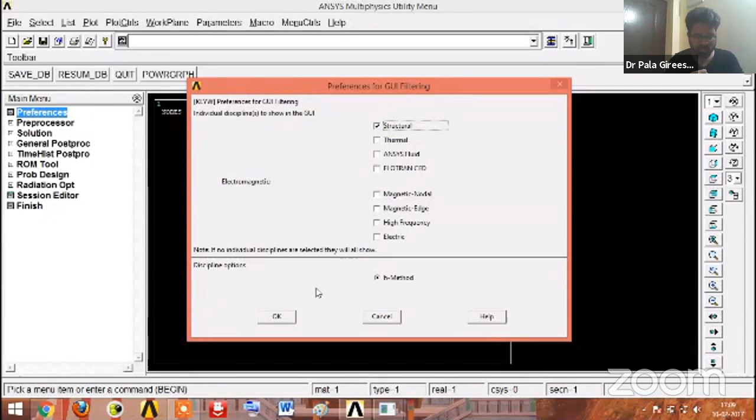Is it visible now? Yes, your screen is visible, sir, your desktop screen is visible. Is it running? No, we are still able to see only the desktop screen. Now something is coming, click play, sir. Is it working? The answers are visible, sir. Okay, now it's running, the answers are showing properly, sir. This is okay.

At the end I'll show this. Please help me out at the end, maybe after 1 hour. Sure, sir. After 1 hour I have my presentation, after that I'll show this. Okay sir.

So shall we start now? Just we will have some introduction first, then we'll begin.

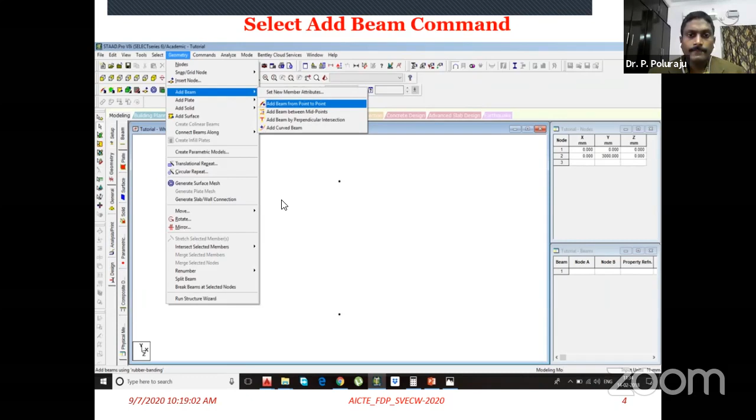So after that, you can draw one point to point, whatever nodal points we have created. Then after creating the nodal point, by using the geometry option again, after selecting the created add beam between two nodal points, you have to select that and go to geometry again and take the translation repeat option. Translation repeat basically happens like this.

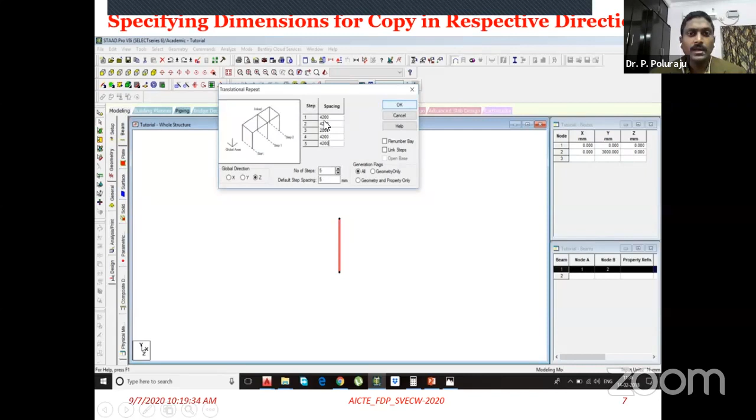When you open this, it will give the global directions like X, Y, Z. So I wanted to copy along the Z direction, and set how many steps or bays I want. That is a 4.2 meter bay width, and I wanted to make around 5 bays. So that's how I have created it, you can see here.

This is created. Then again select, and wherever I want, like now in the X direction, how many bays - it depends on your building plan. After creating like this, you can create all connected beams on the top floor, because at the bottom that is nothing but foundations. Foundations generally get a fixed support given, and in the software also we give the same scenario.

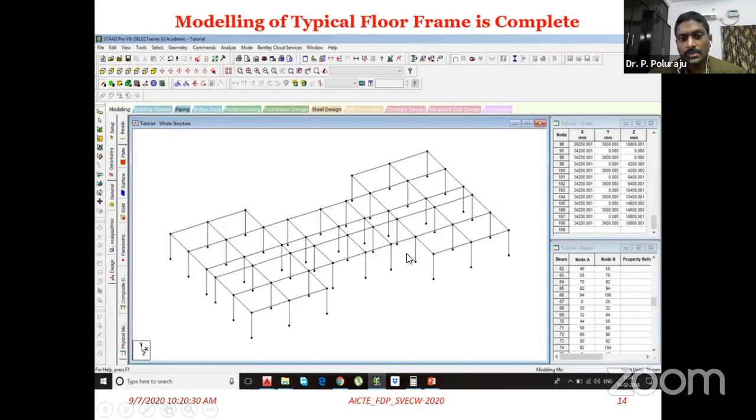After creating that, it's like a typical customized plan. One side has a number of spans, whereas in between it is reduced, because it is maybe a lift area or lift portion. There is also an open to sky area. These are all there, so it's a typical plan, and of course when it comes to the model, you can understand that.

Then using the translation command, we replicate frames for higher stories. Again using translation repeat from the geometry, it can be replicated from whatever we want in the vertical direction. So this is ready now, you can see the vertical direction. Likewise, the modeling of the frames of the building is complete.

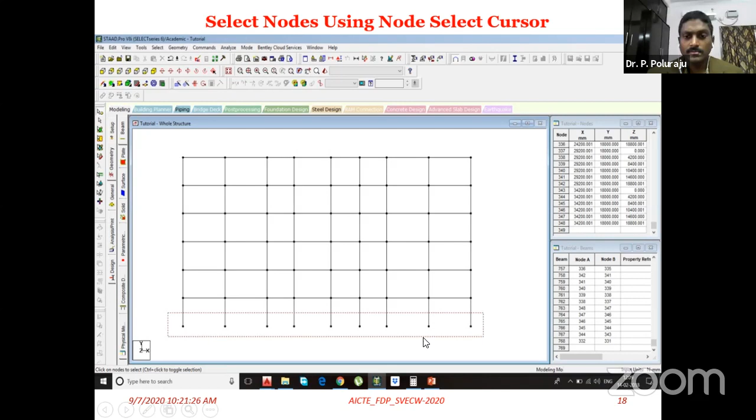You can select the front view of your total model. Then go to the select option. In the node cursor, you can select all the bottom nodal points at the bottommost level. At a time, it will be selected. It looks like only one side is selected, but it will be selected overall in our building, under all the nodal points.

Then select the support sections, the support option, create new support condition from the menu bar. You can see the support conditions here. From the support condition, you can create the fixed support. After giving fixed support, you can apply it.

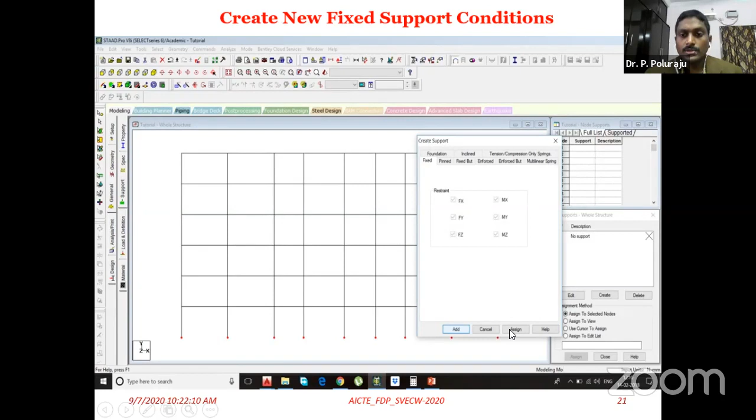For fixed support, generally three translations and three rotations would be there. All of them you have to restrict, meaning you have to hold them. So FX, FY, FZ, MX, MY, and MZ, you have to hold. Then you have to click on that, actually check that. Once you check and add that option, it will be assigned to the selected nodal points at the bottom.

Now your total building is fixed at the bottom, because it indicates the simulation of the fixed support of your building, like foundations, since all buildings are nothing but cantilever problems. Is it correct? Cantilever problem means one side is fixed and the other side is free. So if you talk about the topmost portion of your building, the terrace portion, that's free.

So your building is typically nothing but a cantilever problem. So fixity is assigned. Now the 3D view after support assignment, you can see it has been assigned everywhere.

Then after that, you can add the plate command to create walls. That can be done from geometry, from add plates. You can use the quadrat, because quadrat means you get 4 points. So wherever you want, you can select those 4 points, depending on your nodal points, wherever you want the wall or slab. Slab is nothing but a diaphragm.

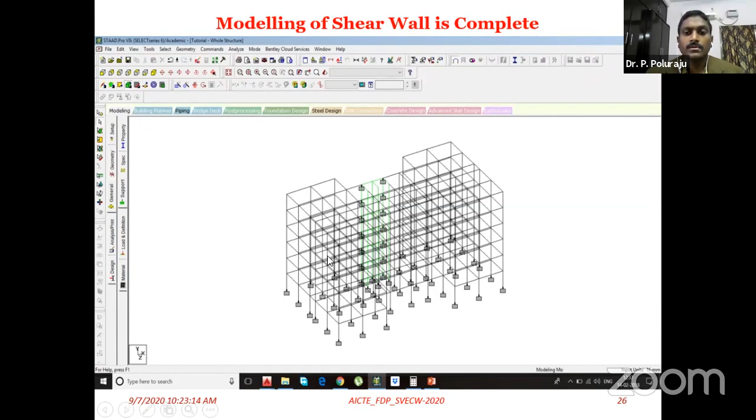So modeling of the shear wall is complete now, because by using this option, the shear wall has been created here. What is a shear wall? Shear wall is nothing but like a lift wall. In majority of cases, lift walls are generally solid concrete walls, so it will act as a shear wall as well as serve for lift purposes. After creating that, you can see the top view of your shear wall portion.

Now, after the shear wall is complete, the next point is you can create the slabs at different floors. I am creating this according to my own understanding. I will not say it is a cellar or ground floor. It is basically a stilt floor, wherever you park in any apartment. Just above the stilt floor is the ground floor. Above the ground floor is G+1, G+2, G+3, and so on.

This is very important, especially regarding the jurisdictions of Vijayawada building bylaws, Guntur building bylaws, Hyderabad building bylaws. Based on that only, they give approvals for the number of heights of multi-story buildings, depending on the road width in front of your site. For example, you may have a large site, but if your road width is only 12 feet, they will not allow that much height for the building. And it will vary again from Gram Panchayat to corporation.

If you talk about Vijayawada Corporation, the rules and regulations, all setbacks will be totally different compared to Gram Panchayat. In Gram Panchayat, there are no much critical permissions required, you can go with some flexibility. Even from a setbacks point of view, there are some guidelines they provide, like the VMC, Vijayawada Municipal Corporation, now converted into CRDA, Capital Region Development Authority, similar to Visakhapatnam Municipal Corporation.

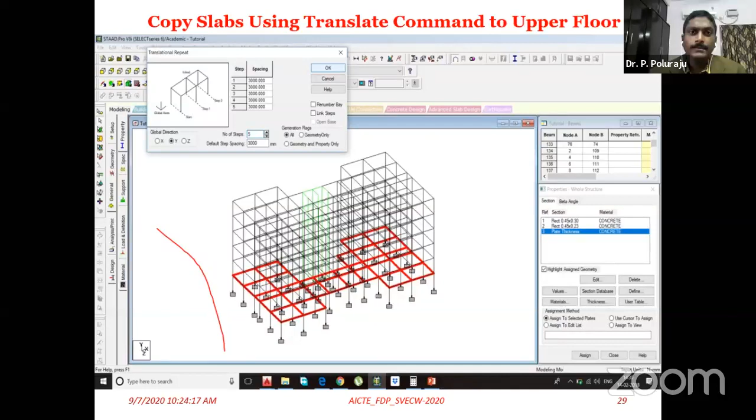And check geometry for multiple structures, whatever the model, everything is created. We have to check for multiple structures, like any duplicate nodal points, or any duplicate members we have created, because it can get very clumsy.

Even simply, I can say this is a little bit of work only. But when you talk about G+100, that time heavy work will come, with a heavy number of nodal points and number of beams. There may be a chance of overwriting of the nodal points as well as members.

So you have to check by going to the menu bar, tools, check multiple structures. Then after that, it will check again - check duplicate nodal points also can be checked like this. The enter tolerance means you are not allowing any tolerance, because if any nodal point is created closely without your notice, that tolerance you have to give so everything will be adjusted.

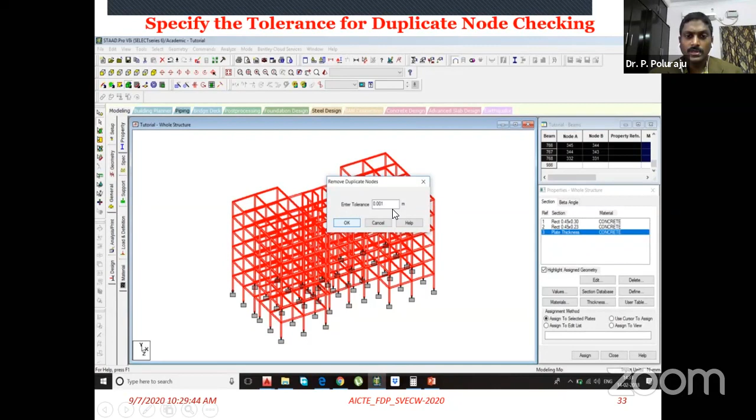Once that is over, the next portion is entering the geometrical properties, because if you want to do the analysis for the created model, this is only a skeleton so far. You have to give the beam depth as well as width, and column cross-section too. Even slab thickness you have to give. The height of the column and length of the beam are already given in the skeleton model itself - now you are giving the geometrical properties of both beam and column, and even slab.

Once you have given these, you can see on the right-hand side rectangular 0.45 means 450, and 0.3 means 300. Again 0.23 - why is it 0.23? It is actually for the beam. Why 0.23 means generally all beams should flush with our two-thickness brick wall, that is, two brick wall thickness.

What is two brick wall thickness actually? 230mm, that's a 9-inch wall. So it should flush with your beams. That is why the width of the beam matters for that, but otherwise width of the beam will not influence anything. Depth of the beam only will influence the bending moment, whatever is coming.

Suppose one column to column distance is more than 5 meters. As per my experience, you must introduce another column in between. Otherwise, you must go with the beam depth more than 600 or 750mm. If it goes beyond 750mm thick depth beam, you have to introduce side face reinforcement as per code, and again it may lead to a deep beam.

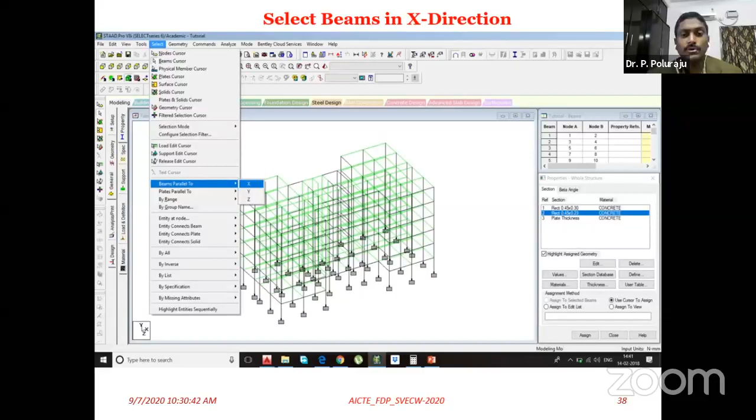Waffle slab means small box kind of things you might have seen. That means a number of beam combinations will be there without intermediate columns. At the end also columns will be there, but it is so costly, because of the number of beams you are introducing, and it looks like one box kind of roof. You can see that is a waffle slab. So that's one idea I'm giving.

Anyhow, beams parallel to X means everything selected along the horizontal direction, and beams parallel to Z also can be selected, another direction. You can see in the coordinate system, X and Z, and Y is always vertical. So after that, once you select it, it has assigned the beam dimensions.

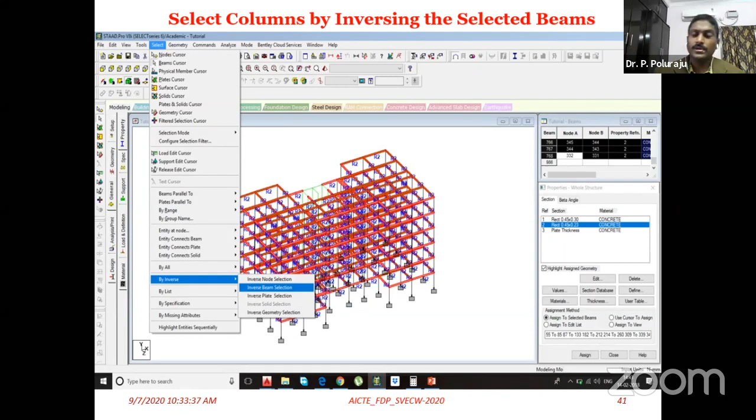Now select the inverse beam selection. Sometimes, if inside a room a beam is coming, you want to shift it into the wall, above the wall. You don't want to keep it in between the center of the room. So that also comes under inverse beam selection, and that can be done too.

Then after that, select all plates and assign the plate property, that is thickness. After that, when it comes to the lift area, there are simply supported beams also.

Sir, for simply supported beams, do we directly keep the roller and the hinges? No, roller and hinges we will not keep. It will look like a rigid beam only, but we will design that beam as a simply supported beam. How do we design a simply supported beam?

Basically for the fixed beam, your bending moment diagram formula with UDL is WL square by 12. For simply supported, it's WL square by 8. So WL square by 8 means denominator is only 8 for simply supported, whereas for fixed support denominator is 12. That means it indicates you are keeping more reinforcement in the simply supported beam.

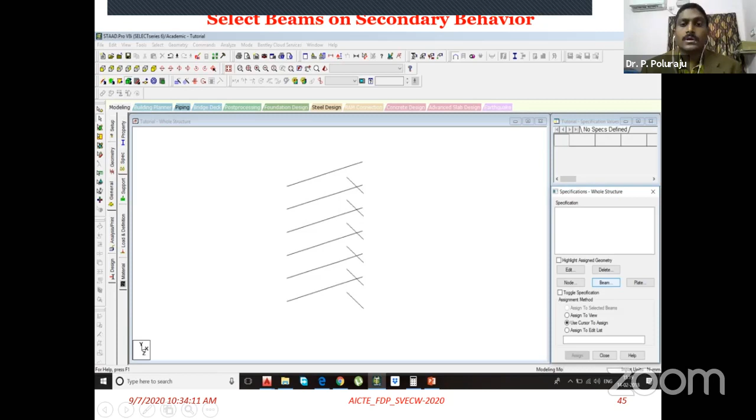So likewise, you have to design the simply supported beam wherever required, especially secondary beams. Secondary beams means beams resting on another beam. The beam resting on two columns, that means supports, is the main beam, which is directly looking like a rigid beam, nothing but a fixed beam. Whereas the secondary beam, which rests on another primary beam, is actually converted into a simply supported beam. In the software, you will release the moment.

You know contra flexure, point of contraflexure.

If you talk about the simply supported bending moment diagram, and the bending moment diagram for the fixed beam, you can observe negative bending moment at the fixed support because of the fixity at both ends. Negative bending moment means you have to provide additional reinforcement at the top, whereas for positive moment, reinforcement is kept at the bottom. That is the reinforcement detailing we practically follow.

And in the software, you have to release the moment there. Then automatically that beam will be designed as a simply supported beam.

This can be done by selecting this option. You can select this and release the moments wherever you want. Once you release the moments, you can see this beam is simply supported, and this beam is one side simply supported, meaning it is not fixed here. Again, this beam is one side fixed and the other side free. But this beam looks like a simply supported beam, and this one too.

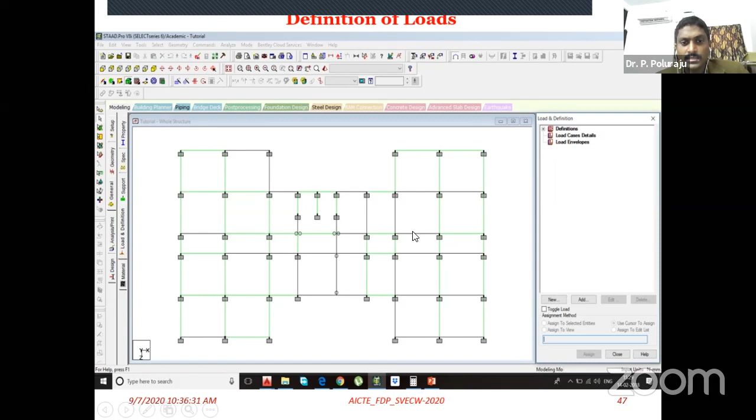Here also this is a simply supported beam, because it depends - see this beam, if it is resting on two supports, two columns, correct? Whereas this beam is not resting on any column, it is resting on a beam. So this is a secondary beam actually.

So this is all about releasing the options and how to convert the beams from fixed support to simply supported. Next, moving on to another thing: load cases, like load assignments.

Dead load and live load are the service loads. Apart from that, wind load and earthquake load are occasional loads, depending on your requirement and the locality of the building construction. You have to adapt both wind loads and earthquake loads.

When you talk about wind loads, up to 10 meters height of the building, you don't need to consider any wind load. Beyond 10 meters - each floor is 3 meters, so after about 3 floors you have to consider the wind load effect. But once your building is more than 10 meters height, you must consider the wind load on the entire height of the building. It's not that up to 10 meters no need to consider.

If you add wind load only above that height, it will give another problem. So the condition as per code IS 875 part 3 is: up to 10 meters height, any structure, you don't need to consider wind load effect. If your building is going beyond 10 meters height, you must consider wind loading on the entire height of the building, using one of two methods.

One is the nodal method, otherwise the diaphragm method. Nodal method means at each and every beam-column connection, which is a nodal point, you convert all the wind pressure acting on the columns into a point load at that nodal point, because pressure is in kilonewton per meter square, UDL is kilonewton per meter, whereas point load is in kilonewtons. So like that you have to do.

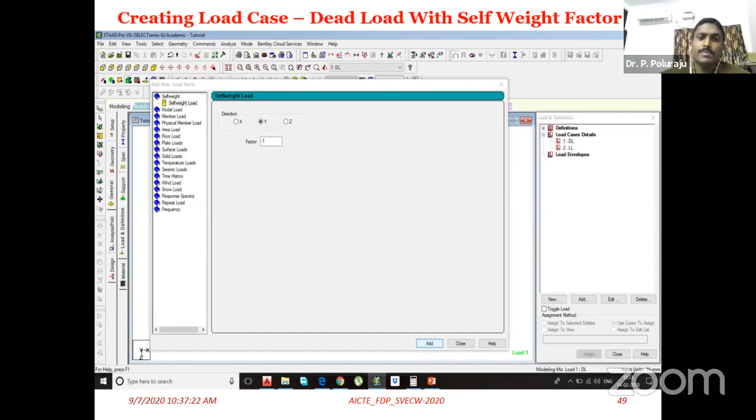Under the dead load, you can first adapt the self weight. Self weight is nothing but 25BD, where 25 is the density of concrete, B is the breadth of the member, and D is the depth of the member. We don't consider length separately, because it's automatically built into the calculations, so this factor is per meter length.

Why minus? Downward, because self weight always acts downward due to gravitational effect, not upward. If you don't add the minus symbol, the load will go up and all your calculations and results will vary and be inaccurate. After that, you can add the self weight and apply further loads on it.

Then you can add the live load. Under live load category, it's nothing but a corridor or lobby load. In the lobby you apply some load, whereas in a pure residential area the live load will be different, because in the lobby you won't keep any cot, furniture, or sofa seat - maximum only human beings will walk there. So lobby load will be different live load.

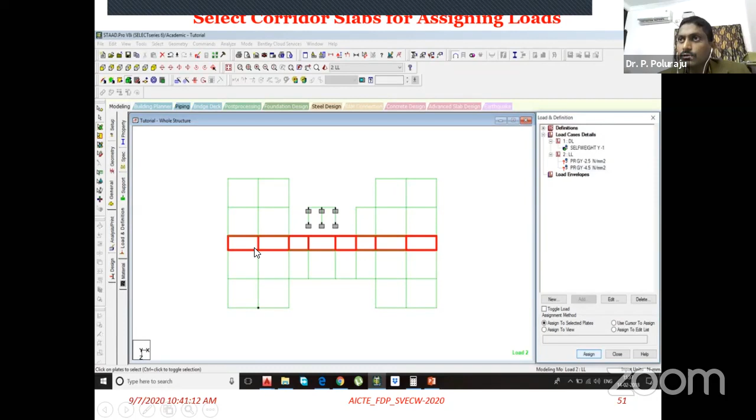Based on that only you have to design the slabs. Why unnecessarily put extra loads on all slabs similarly? That's basically the mass way of doing construction, like a G+5 masonry building - a mason can also construct it, an engineer can also construct it. What is the basic difference between him and us? We have to look after economical construction and give economical design.

Whereas he will do everything like a thumb rule. He won't even check the level of the wall or plastering with a spirit level. He will take a tube filled with water - you hold one side and another person holds the other end. If both levels are same, for him that's leveled. But that is not accurate.

Even what basis will you design the beam? Even if you do typical calculations, whatever he provides practically without any design, the same thing comes out. But from our engineering point of view, we must think about economy - where bending moment is maximum, where it's lesser, and which type of bending moment, negative or positive shear. These factors we consider, whereas he won't see any of that.

What he will do, I'll tell you the thumb rule he follows. For every 1 foot of beam length, he provides 1 inch depth of beam. 1 inch means 2.54 centimeters. 1 foot length means 30 centimeters, 12 inches. So for a 5 feet beam, he provides 5 inches depth - that's 5 into 2.54 centimeters, converted to mm. This is the thumb rule he follows.

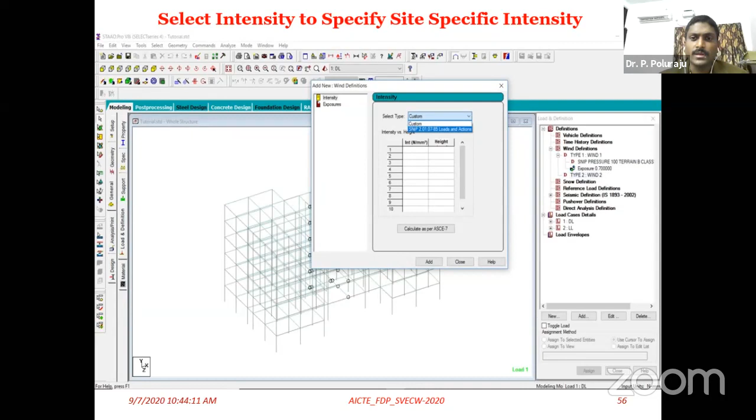So after applying this, the next step is seismic loads, actually earthquake loads. Earthquake loads depend on zone 3 or zone 2, zone 4 or even zone 5, otherwise zone 2. You have to select this depending on your building location, and you have to apply all the factors by calculating.

Now the next important thing is dead load and live load combinations. You must select dead load, live load combinations, that is 1.5. After that, you must move on to the design, actually the concrete design.

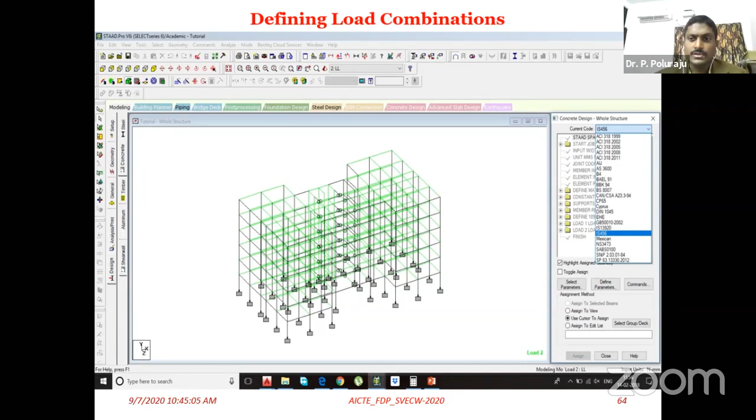For that concrete design, you have to select the IS 456 code book. There are a number of code books available, so you have to select the code book IS 456.

After that, you perform the IS 456 code book. In that, you select parameters, and after selecting parameters, you can define them. What are these parameters? Clear cover, depth of the beam, FY main, FY secondary means yield strength, and yield strength of secondary steel and main steel, like that.

I'm giving compressive strength of the concrete. Then this is yield strength of the main steel. Likewise, whatever parameter is selected, everything can be given. Now the analysis part also can be done like this.

After analysis, for the design concrete beam, if you select one beam here, see it's selected, and when you click on this, the design will show like this. So this design may be final, but it may not be granted directly.

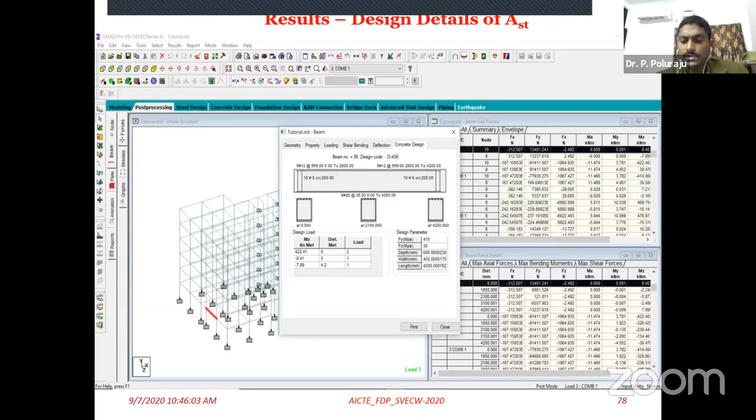We can't take it as granted, but from the analysis point of view, the shear force and bending moment magnitudes are most accurate in the STAAD software. The design again you can do separately. So likewise, the output also can be taken.

Then I'm moving on to the other software, that is Etabs. It has a different feel and different interface compared to STAAD software, which is developed by Bentley people, whereas Etabs is developed by CSI people from the US.

So this is a sister software of SAP 2000. SAP means Structural Analysis Programming Software. But whatever software you take, there are plenty of softwares for doing analysis and design in structural engineering, like SAFE, STRAP, StaadPro, Struds, Etabs, SAP 2000. There are plenty of softwares, like NASTRAN, Diana, TNO Diana.

Of course, those are modeling softwares like Abaqus, ANSYS and all. If you take any analysis software, basically what is the background method for doing all this analysis, like shear force and bending moment, how it's running for multi-story buildings, even one small beam also, how it is running, which method it is taking, whether moment distribution method or slope deflection method or Kani's method.

So these softwares are all running with advanced technique methods, like flexibility matrix method and stiffness matrix method. I would say the background analysis method for these softwares is the stiffness matrix method, because stiffness matrix method is a displacement based method, and displacement based method is the most accurate one.

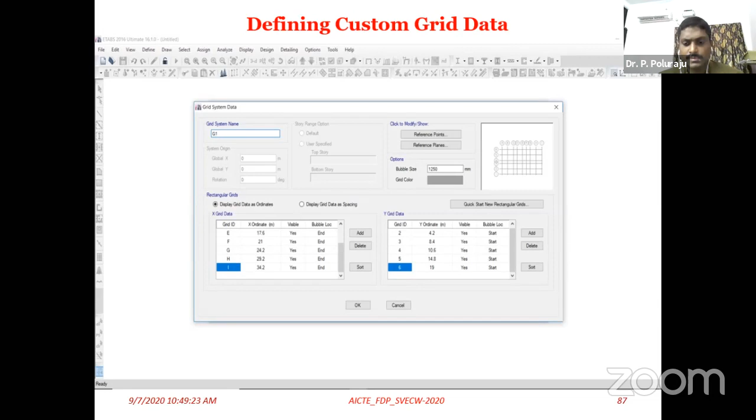That means you don't have any similar spans of columns like 4 meters and 5 meters. You have different types, 3.5, 3.75 meter lengths. In that case you can customize by clicking the customize grid spacing option, edit grid data.

After that you select grid only, say OK, and it moves to the actual working area. Then as usual you select material properties. M30 has been selected here, and you can change all parameters like Young's modulus, Poisson's ratio, coefficient of thermal expansion and shear modulus.

For concrete, Young's modulus is calculated as 5000 root FCK, this is for RCC. For PSC, that means pre-stressed concrete, it is 5700 root FCK. This is as per the code book.

But as you know, the IS 456 code book is getting revised now. Very soon, maybe January 2021, you can expect it to be implemented, because hereafter there will be no more separate pre-stressed concrete code book. The pre-stressed code book is also being merged into IS 456 only.

It is going to be a very heavy volume, that IS 456 code book. It is being done by Dr. C.V.R. Murty from IIT Madras along with Rupen Goswami and some other IIT professors and faculty members associated with that revision.

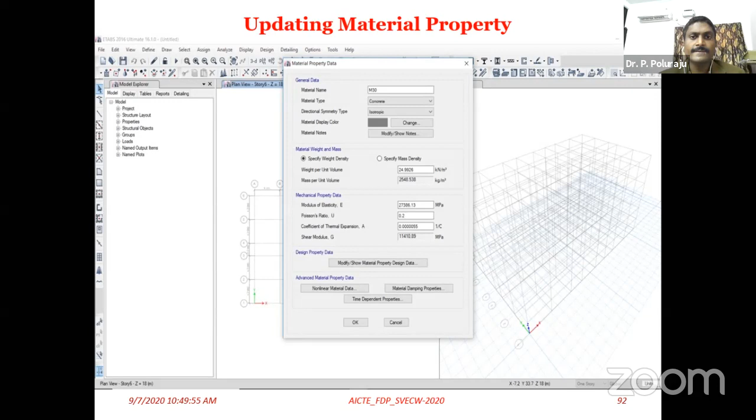Then defining sectional properties, that means column size and beam size can be given like this. There are ready-made section properties like rectangle, square, circle and other types of sections. It can be selected like rectangle, and you can edit all the input data. The frame section property reinforcement can also be given, like column reinforcement details and beam reinforcement details.

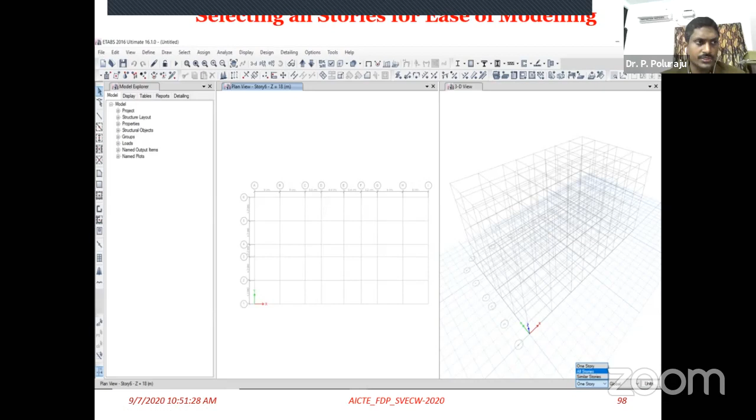But what is the great advantage in the Etabs software? At a time you can do all the floors at once. It's not like STAAD Pro, where you create one floor and copy it to other floors. In Etabs, if you select all the stories, whatever work you do at the bottom is automatically applied to the top floors also. That is the great advantage — the work gets completed at a stretch.

Then click the draw beam and columns option. You can draw like this — at a time, using one selecting box, you can apply the columns for the whole building plan in the Etabs software. The work will be very, very faster than STAAD Pro. So it can be seen like this.

Then selecting the joint restraint command, that means support conditions, similar to the earlier work. Then again selecting the command for drawing beams and selecting beam cross sections — whatever beam cross sections you have given, you can apply that. Now you have a ready 3D view of your building modeling, the frame modeling.

Once that is ready, you can go for the slab sections. Slab sections can also be applied like this, similar to the shear wall area, what I would say like the lift area.

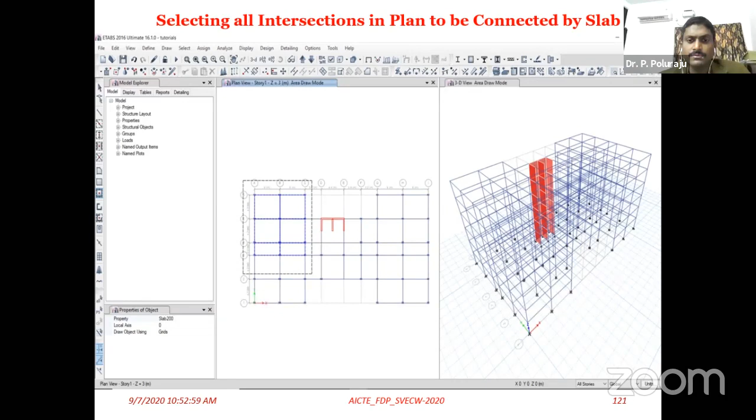Then move on to creating the horizontal slabs for each and every floor. Like this you can get it.

Then releasing options for the secondary beams, same scenario as done in STAAD Pro software, and loading patterns now. We are adding the loadings and enabling visibility of slabs for easy selection, so that selecting doesn't override another nodal point. Whatever you want to select, you can do this option.

And selecting all slabs on individual floors.

Now modifying the wind loads. All wind load calculations, like windward coefficient and leeward coefficient, are available from the IS 875 code book. There you can find the basic wind speed of Vijayawada, given in the appendix as 50 meters per second. That is the basic wind speed of Vijayawada, and it's 47 meters per second for Delhi. Visakhapatnam is also similar, at 50 meters per second.

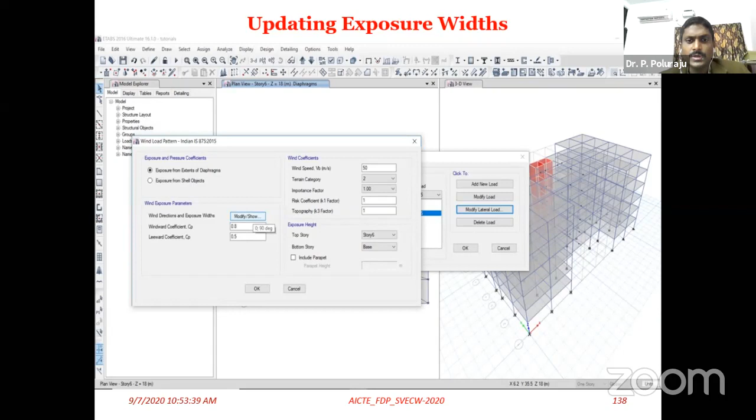So the wind calculations can be applied like this. Then earthquake loads - earthquake loads again depend on your zone factor, I value, and your response spectrum. You have to give all these values.

And once that is over, you have to work on load combinations. Once load combinations are over, then you have to apply whatever loads you have taken on that. Once loads are applied, everything will be ready like this.

Now you are setting the analysis, run analysis. Once it is over, your output will be shown - the deformation diagrams of the whole building. Then once the deformation diagram is completed, you can see all shear effects and bending moment and stress concentrations, everything in different colors.

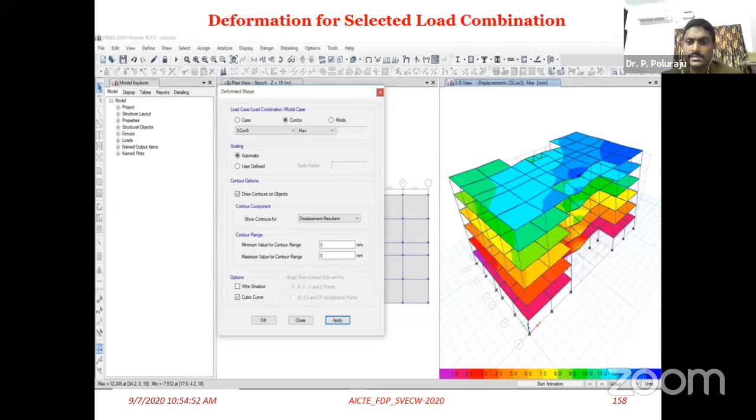Actually, it shows the level - it's actually like a finite element analysis kind of interface. That facility is also there in the latest version of ETABS. So like this, you can see all the forces.

So once that is over, then moving on to another portion, that is concrete design. Concrete design also, as per availability of the options, you can apply the same scenario, but for beams and columns, the basis for design is the PM interaction curves, PMM curves, MU by FCK BD square.

At the vertical side, and at the bottom side you have a percentage of steel, and PU by FCK BD, that is from an axial point of view. So for both column and beam, it's PMM3, PMM2.

So that is also one basic thing you must understand, because it will help you when you move to the P-delta analysis for high-rise buildings. That point will be very helpful. It's like an advanced idea about the analysis and design of any building.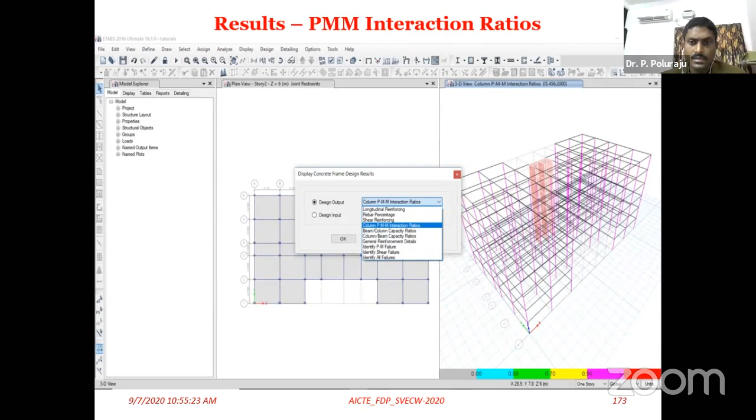Then once that is over, this report can be generated like this. Yeah, so which is actually a repeated thing, that is why I'm skipping it - don't mind otherwise.

If anything is not satisfying - meaning if it is not passing, like depth of the beam and column, size of the column - if it is not satisfying, it automatically shows that it is not satisfying. Then you can revise that column and beam, and again start designing. It will do the redesign, and finally it will give you both the analysis and design in ETABS.

So now I'm moving on to SAP 2000. Using SAP 2000, I'm going to show the pushover analysis. So we will discuss what is meant by pushover analysis. For that, first of all, you must do the modal analysis for the given building.

Like maybe you have one G-plus building, but with a different planning - plan is there, it's not like one similar plan like a two-room building or four-room building. It's like a customized building, like a live structure. So you can take that and do the pushover analysis for it.

What is meant by pushover analysis? I'll give you a very good idea on pushover analysis. Pushover analysis is basically a non-linear static analysis - first point. After that, in pushover analysis, for existing buildings you can do pushover analysis, and for proposed buildings also you can do pushover analysis.

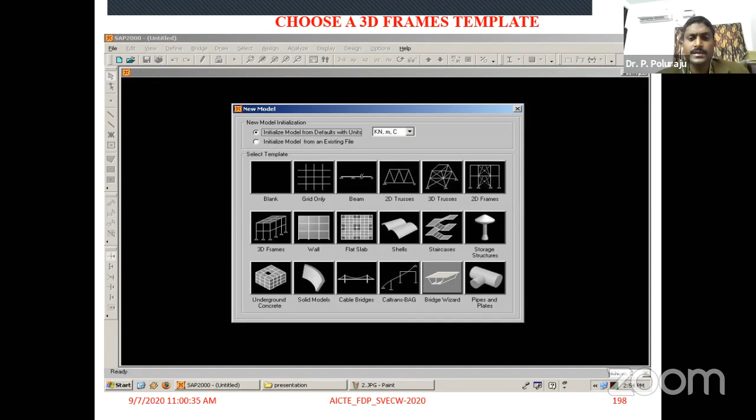Moving to the next step, select new model here. Then choose a 3D frame template. After clicking on that, similar to Etabs, you can select the number of bays and number of floors as you want, and customize by editing the grid data. Once everything is ready, your full-fledged model will be shown in the window like this.

Once that is ready, go to define and give the material properties - concrete can be selected, and you give internal parameters like slump and everything. Then frame sections can also be given, like the size of the member. Add rectangular section, give depth and width of the beam - beams and columns are added, like C1, C2, C3.

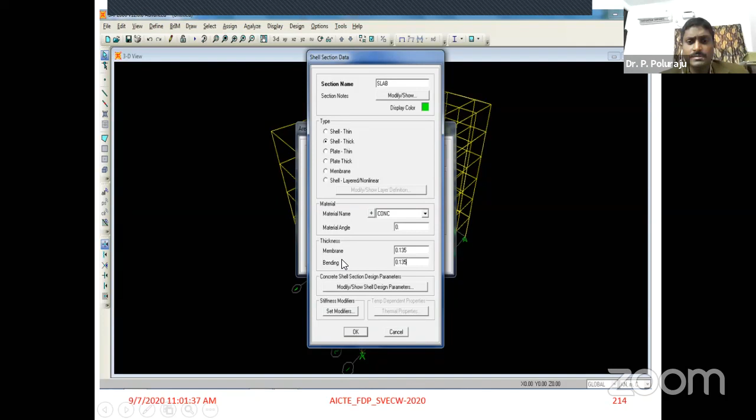Then area sections, that is for slabs. Shell thickness can be given, generally 115mm thickness, otherwise 150mm or 130mm thickness like that. Here it has been given 135mm - membrane or even bending, both are the same.

Then going to plan view, set 2D view, which means top view. Then you can go to the bottom floor. In SAP 2000 software, if you want to go to the bottom floor, there are options - you can shift to any floor using the arrow points in this menu bar, in this toolbar. These arrow points take you to different levels of the floor. This is a slight difference between Etabs and SAP 2000, but the majority of commands and the working interface will be almost the same.

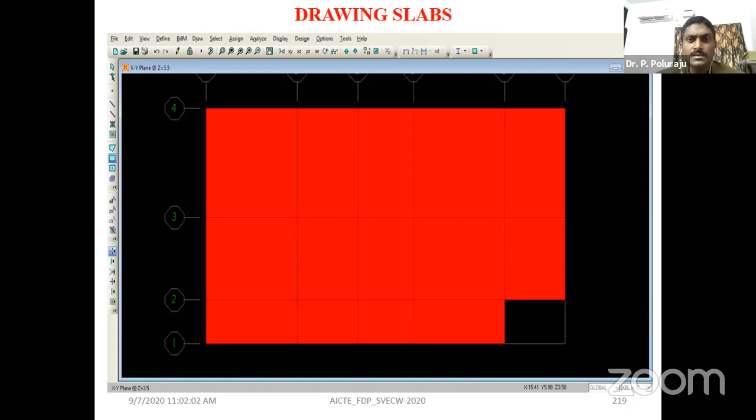After creating this, you can see the slabs. After creating the slabs, you can copy from bottom to top wherever you want the replication. Once replication is over, assign frames and frame sections. Once frame sections are over, you can go directly with running the analysis.

Dead load and modal analysis can be done as very simple analysis. Modal analysis means it will run with only self weight - you have not applied any type of load. Only it runs with self weight, meaning whatever the depth of the beam and size of the column, only the self weight will run. That is nothing but modal analysis.

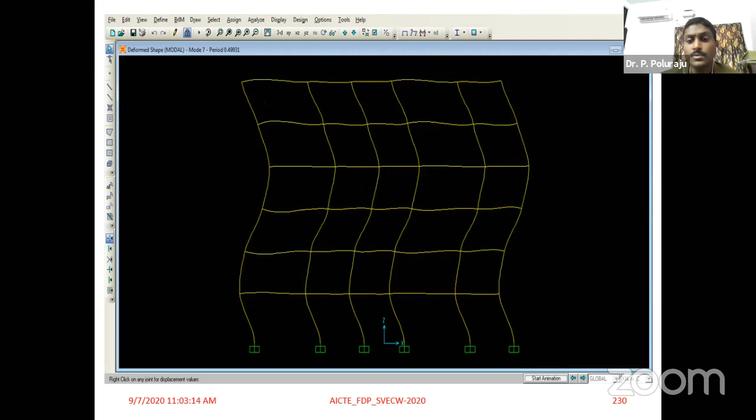So it displays in deformed shapes, and you can see that in different modes. In the different modes you can see the deformation diagrams, and now it shows bending moment due to dead load - that is dead load, nothing but self weight. Once that is over, that part is compulsory for any structure.

After that you move on to the response spectrum analysis. Why response spectrum analysis is required - because basically you want to apply horizontal loads in the form of earthquake loads. You must do that process first, then only you go to the pushover analysis. Response spectrum analysis - how we do it, you can see the step-by-step result.

Go to the define load cases, and when you click the 'add from' dropdown button, there is nothing but response analysis, a type of category, nothing but quake. After applying that, you can apply the parameter on these slabs.

You can see from here, displaying the assigned live loads.

Once that is over, go to the functions from the define menu. There is a response spectrum. If you select the response spectrum file, it will automatically generate the response spectrum values, which are already interpreted in the software depending on your zone factor. Based on the zone factor only, since you are doing your building analysis and design for zone 2, these values will come.

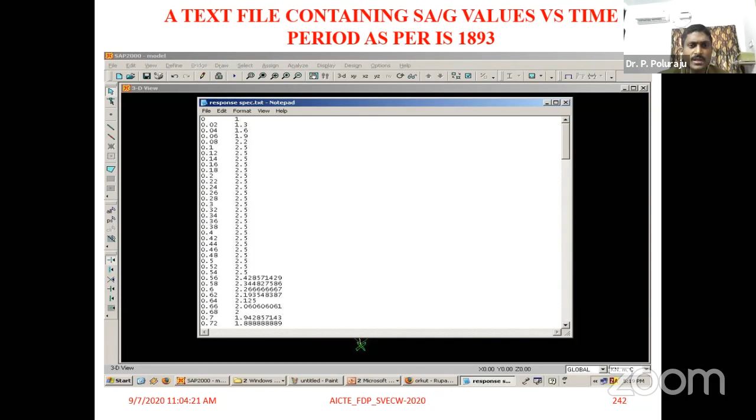So these values you have to take, and you have to generate the response spectrum function definition here. If you want to edit a little, you can, but these are the most important values from that file.

After that, again go to define and combinations, and add the dead load and live load combinations. Now for analysis cases, go to the response spectrum analysis under the earthquake load; you can add that. Now you can set the analysis case data and add the response spectrum analysis here.

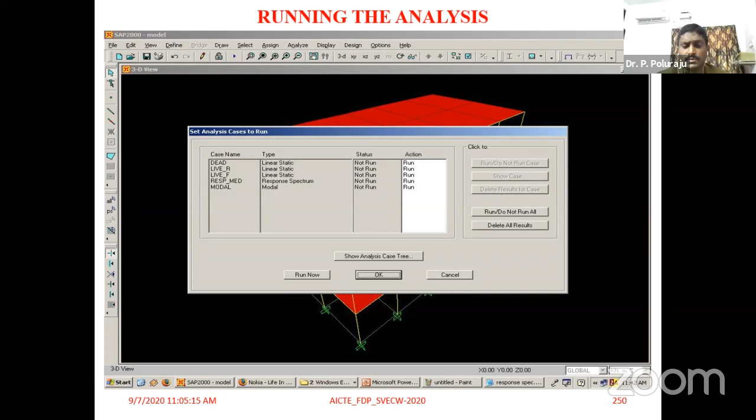Now you can set the analysis to run. Along with the dead load and live load, everything in the model, even the earthquake load response spectrum analysis, will also run simultaneously. Once that is over, you can see all the bending moment and shear force diagrams for the different load conditions.

The response spectrum values can be taken from the show tables. Go to display and show tables, and from there select the response spectrum values, select everything, and export all the tables to Excel.

In Excel it will select, you take all the U3 and R1, R2 values, because in earthquake analysis we calculate the base shear from these. If anybody knows about this, faculty members or anyone, they may understand. Even master's degree level students and PhD holders may understand what I'm speaking about, the lateral loads in the form of base shear calculations.

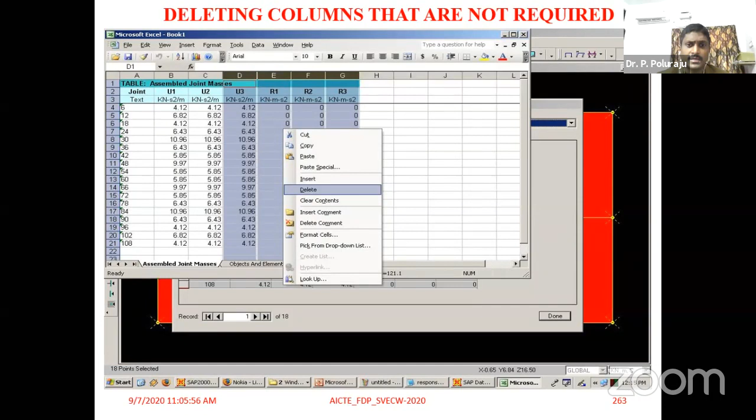So the base shear calculations can be taken directly here, and these values depend on the height of the building. These values are shown in the mass distribution along the floor heights.

Now, pushover analysis using SAP 2000. In the pushover analysis, go to edit grid data by right-clicking on the window.

Once that is done, if you want to do anything additional, especially for pushover analysis, you do it at the center of mass of the building. You remove some portion there and apply horizontal forces, basically shaking the building. That's what we are doing. You can see the removed portion here.

Now, deleting slabs and inserting joints at the intersection of beams and grid lines, then selecting the joints for assigning constraints.

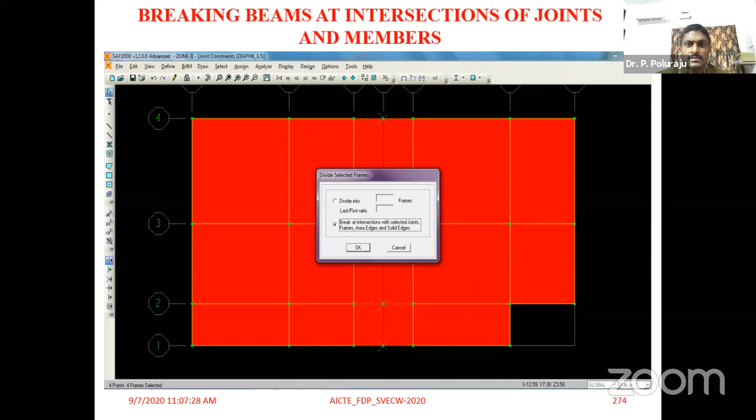Step by step we can see this. Diaphragms mean assigning joint constraints there, selecting all the joints, changing labels of the joints at all levels, breaking beams at intersections of joints and members, and assigning story mass at the center of mass at different levels.

Are you able to see the procedure I have explained? The values shown in tabular form have been given here at the center, along this direction. Again, the lateral forces along floor heights are also shown here.

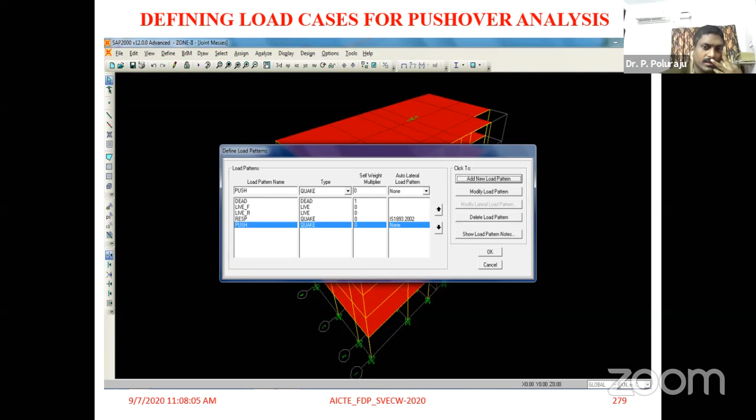Along with the earthquake load, you are adding the push load, which is also under the category of quake only, correct? So now, defining load cases for pushover analysis, assigning lateral loads at the center of mass. Now you can see that.

So, defining hinge properties now for the frame sections, and the hinge portions, because as I told you, pushover analysis has to be done through hinges only at the beam-column joints. Now you apply the push load at the center of mass, planning to shake the building, but to resist that you have to give plastic hinges at the beam-column portions.

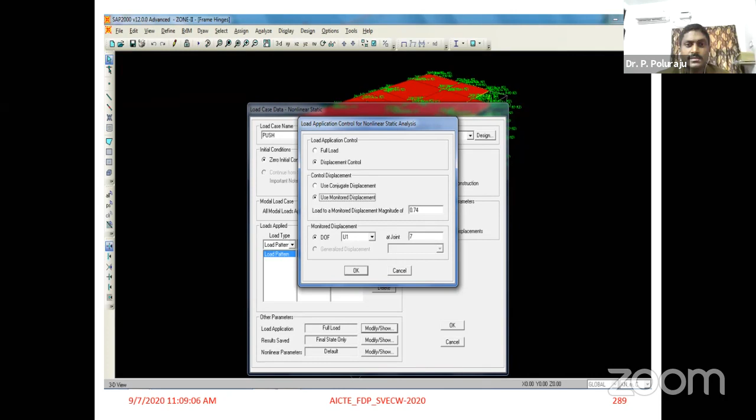Now the next step is assigning hinges for beams and columns, and defining nonlinear cases also. Like again, load cases we are setting up. Earlier it was a linear case, now nonlinear static case. So once you set that, then nonlinear parameters also it will show. Then you have to cross check all these nonlinear parameters. Almost by default you can keep everything.

Then now you are defining the load cases as usual, from dead load, live load, even modal load, and the response spectrum and pushover analysis load. Now you are analyzing the total analysis, and hinge results you can see, whatever we assign, it is showing like this, correct? Yeah, you can see from this photograph the hinges at the beam column connections, and nearer to beam column connections, these are the most critical places to take care of.

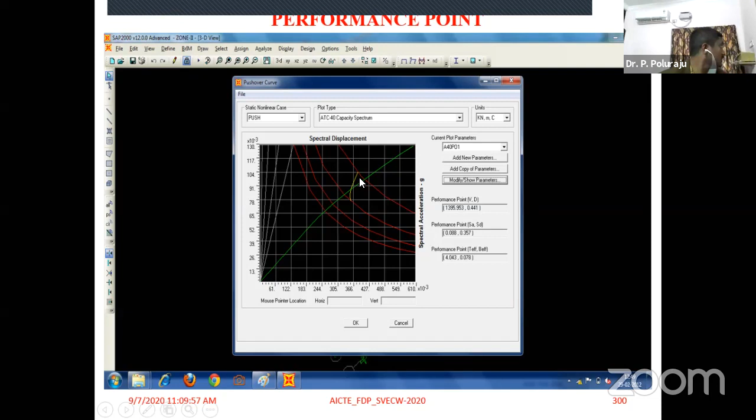Yeah, this is actually hinge results it is showing. Now, by using pushover analysis for different ideas and applications in the structural systems, one very great idea actually.

Very soon, my dear participants, very soon, no more limit state method also. Working stress method, we are not experiencing it. We are not in practice now. Limit state method we are using.

In the limit state method, what is the main criteria? The partial safety factors are there. Two are there, like one is limit state of collapse, and another one is limit state of serviceability. Limit state of collapse covers flexure, shear, compression and everything. But when you talk about serviceability, deflection, cracking, fire, everything comes under that.

What is the great advantage with the limit state method? Why it was very popular from the 2000s when our code was revised in the year 2000. See, 20 years it has taken to revise again our IS-456 code book actually. So why is limit state method so popular?

Because of the lot of safety you are doing on two sides actually. One is strength wise you are doing, another one is load side also. That means whatever the load is coming on your building, you are assuming it is a higher load, and the strength that is there in your existing building or your proposed building will be less.

That means the 1.5 you are multiplying for the loads, and 1.5 for the concrete, 1.15 for the steel, you are dividing it. When you are calculating the 0.87 fy, how it has come, and again 0.36 fck b into xu, how it has come, all that is because of partial safety factors.

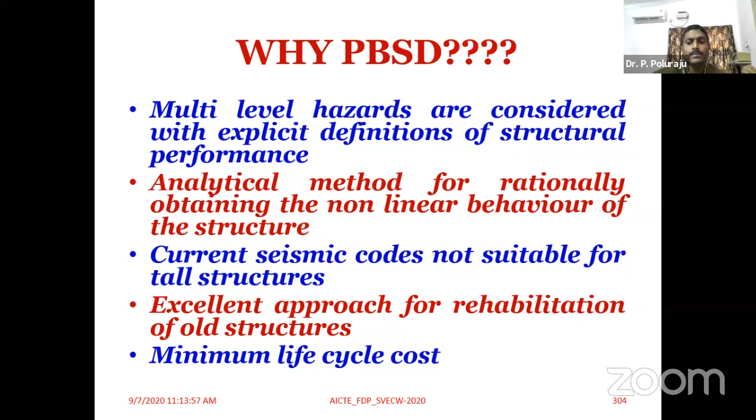Why PBSD? Multi-level hazards are considered with explicit definitions of the structural performance, analytical methods for rationally obtaining the nonlinear behavior of the structure. Current seismic codes are not suitable for tall structures. It's an excellent approach for rehabilitation of old structures, with minimum life cycle cost. This is the basic methodology of how PBSD has been adapted, but I'm not going into detail here.

I'm moving on to the major differences in overall design: code-based design and design based on performance. Actually, it's a direct design approach. This is another method adopted in performance-based design, but this is code-based design.

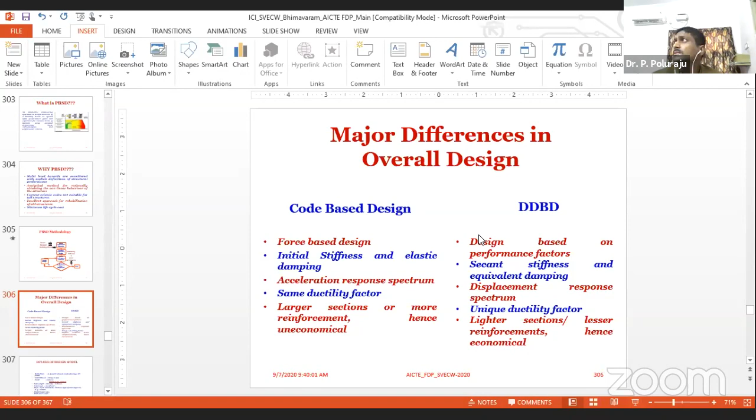Sir, there might be some problems, sir. Is it okay now? Yes sir, it is okay now. Please go ahead, share your screen. Yeah, I'm sharing screen, and I think I may take 20 more minutes. Girish, is it okay? Yes sir. Okay sir, okay.

Larger sections have more reinforcement, hence uneconomical in one sense, and lighter sections have lesser reinforcement, hence economical in another sense. So that is the basic difference.

These are the details for one model. I'm not explaining this in depth because I've implemented it for a PhD scholar and an MTech student, but that doesn't matter. My main objective in today's presentation is that you must know the different ideas about soft computing techniques in structural engineering.

So by using so many softwares, it may be a finite element based software, or a typical numerical based software like analysis-based software. The plan and elevation can be seen here.

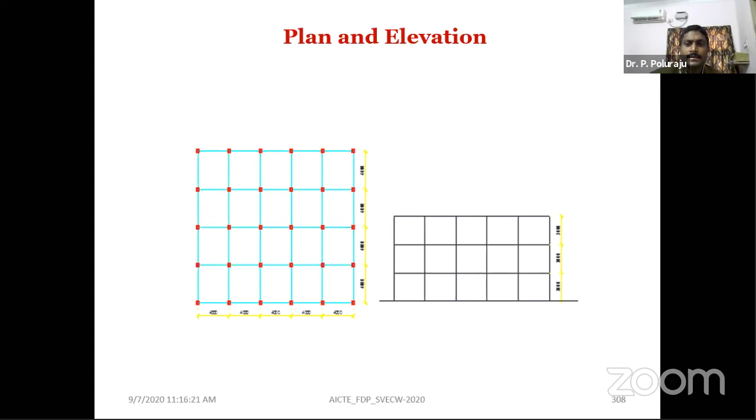IS 13920 earlier it was not there. IS 13920 came in maybe 2000 or sometime, and after that it was again revised. It's a ductility code book along with the IS 1893 code book.

IS 1893 is the main code book. Earlier we didn't have a ductility code book. The ductility code book came only around 2000, after the Bhuj earthquake. In the year 2001, the Bhuj earthquake occurred, and in 2002, IS 1893 was revised, I think in its 5th revision.

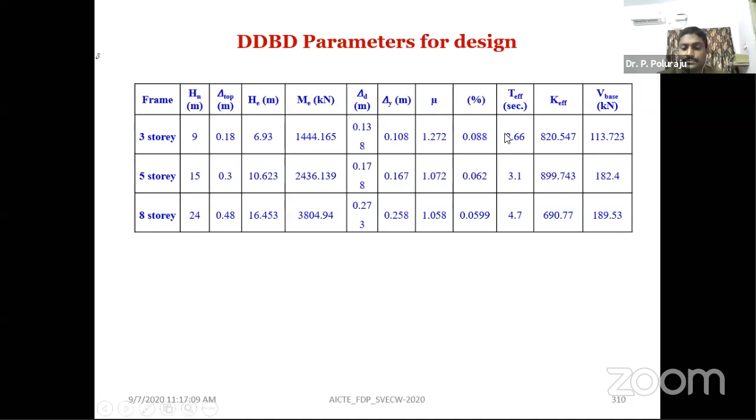DDBD parameters for design: what is base shear, what is horizontal force, delta top meaning displacement, equivalent load, horizontal load, moment, and yield displacement. These are the design force-based design values, and column design using force-based design.

Beam design with DDBD, column design with DDBD. These are totally different, maybe you're not observing because I'm going very fast. The cross sections of the beams and their sizes totally change from FBD to DDBD, double DBD.

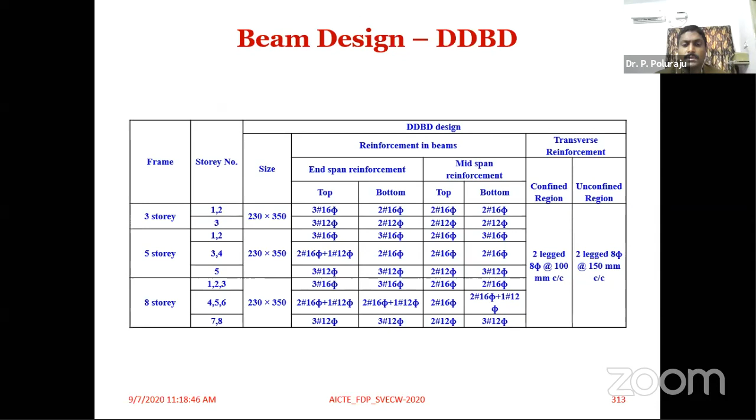Column design for base shear values are lesser, around 25 to 50%. There are different base shear distributions, comparisons of materials used. For the frame, consumption of concrete is 10.23 meter cube, whereas for DDBD it's 9.3 for 3 floors, 5 floors, 8 floors, and so on. That is the parameter.

So there's a saving difference in the form of concrete saving, and also in the form of steel consumption. That's what we wanted to show, the difference. If you really use it, at the same time you don't need to compromise on structural integrity when using performance-based design.

But sir, how do we use it? I'm very fond of using it, but where are the guidelines? Wait for a while, the guidelines are getting ready, they are going to come in drafting form. For that, experts from committees, especially from IITs, are working on it. They will bring it to implementation.

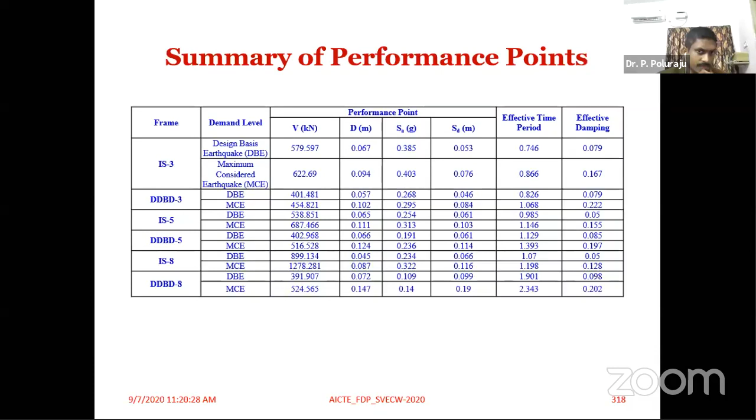Hinges at the columns, and summary of performance points - the points you have calculated, like base shear, response spectrum SA values, and even displacement spectrum SA values, SD values, and different stages of plastic hinges. This is what I was supposed to show in the pushover analysis.

In the pushover analysis, after getting the pushover curve, you are getting immediate occupancy, life safety, collapse prevention levels - beyond this level you should not go. So these are the levels in the pushover analysis. It will decide the level of the present status of your system.

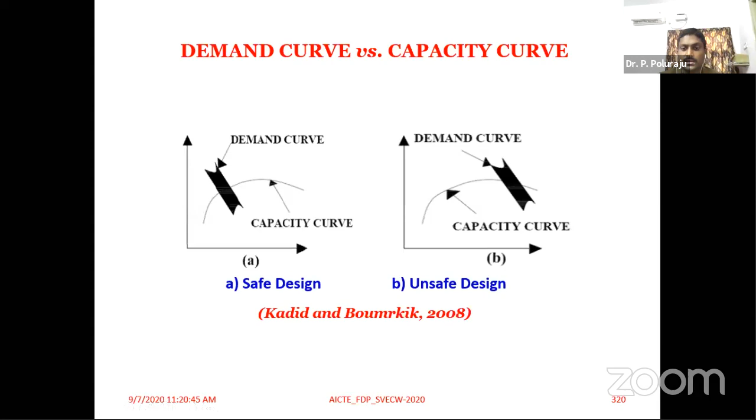These are the demand curve versus capacity curve. Where the demand curve falls within the capacity curve, it is basically a safe design, whereas if the demand curve goes beyond that, it's an unsafe design because the building is under big structural problem.

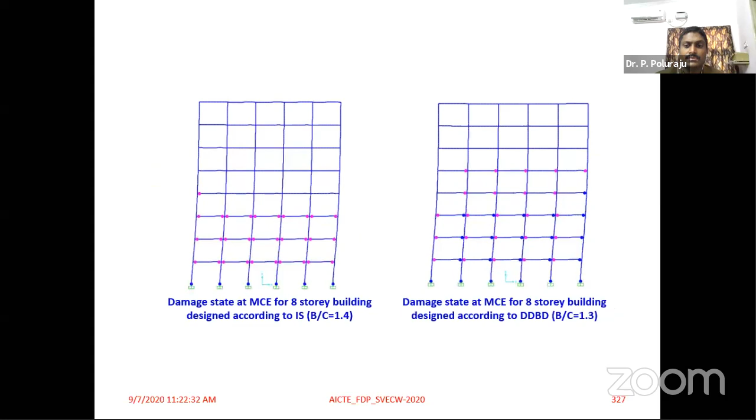Conclusion: base shear by DDBD method is much lower. Code-based design achieves the basic objective of life safety, but Indian code-based design leads to conservative design. A B/C ratio of 1.4 is required to protect the column from damage, and with increase in height, DDBD becomes more effective.

Now, pushover analysis of RC buildings comparative study in seismic zones of India. What we have done here is we have taken the same building, same dimensions, in different locations - say the building is located in Hyderabad, the same building in Vijayawada, the same building in New Delhi, and the same building in Guwahati.

Different seismic zones actually - Hyderabad is zone 2, Vijayawada zone 3, New Delhi zone 4, Guwahati zone 5. So by taking all the zone factors differently, we see how the building is behaving.

Obviously the zone 5 building will behave differently because the zone factors and everything are different. But we wanted to see the behavior with the same dimensions of beams, column dimensions, height of the building, length of the beams - everything the same. So that's what we have shown here.

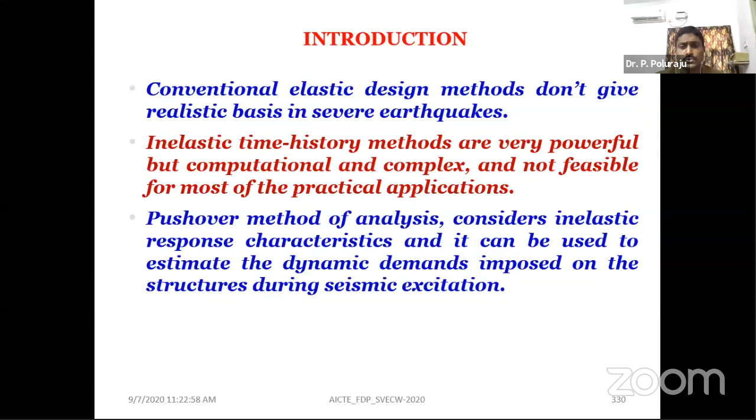The basic idea behind this: conventional elastic design methods don't give a realistic basis in severe earthquakes. Inelastic time history methods are very powerful but computationally complex and not feasible for most practical applications. The pushover method of analysis considers inelastic response characteristics and can be used to estimate the dynamic demands imposed on structures during seismic excitation.

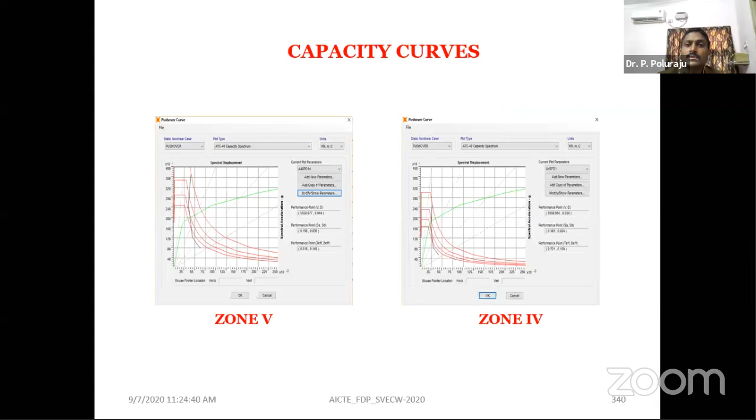So this description of the study area shows how we will apply pushover analysis on the building - the importance of pushover analysis as already explained, the methodology and details, plan view, and demand curve. Finally, after doing the analysis, you get curves like this.

The comparison of performance values - you can see the spectral acceleration in meters per second squared is much lesser for zone 2, whereas for zone 5 it is obviously higher. Then displacement - you see how much higher it comes for zone 5. Base shear also very heavy, and even the effective time period.

Time period is also most important actually - how much time the earthquake has come and what is the R value. And the damping ratio is also totally different from zone 2 to zone 5. This is a basic comparison, and the hinge formation pattern is also totally different for different zones.

And observations, as I already explained, and of course conclusions. Now, behavior of the soft story - again, soft story concept is another very good concept. Generally, you might have observed in so many apartments.

In the apartments, for the parking area, as I told you, that is nothing but a stilt area. What they are giving is like an open column section. They have to construct the walls. If they construct the walls, what problem will they face? For them, easy moving and flooring, like parking, will be very difficult, and lighting also very difficult.

They must always use lights on. For that, what they do is they will not construct any walls along the columns. They will keep it open, but they will only construct a boundary wall, and that boundary wall is different - after setbacks only will they construct it, no?

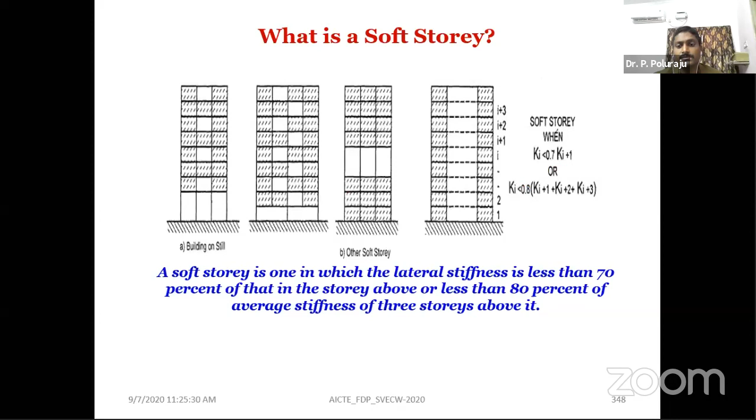Introduction: many buildings that collapsed during past earthquakes is mainly due to soft story effect. Majorly in the Bhuj earthquake also, in the year 2001 in Gujarat, soft story effects occurred. Conventional elastic design, IS code methods, don't give realistic seismic performance of structures in medium and severe earthquakes. Soft story effect - soft story buildings in nature act as, of course, I'm not going to read everything.

So this is the basic problem, you can see from the photographs. This will act like an inverted pendulum. So if there are no infilling walls, the building will sway like this. It may not come back because it is not an elastic one - it is a rigid connection.

So if you want to make it have a little bit of flexibility, you must provide some dampers. You may not provide dampers, but in the place of a damper, your building must be designed for m times x double dot plus c times x dot plus kx equals to zero. This is a free vibration equation.

What is C? Damping coefficient. And m is mass, k is stiffness. So x is displacement, x dot is velocity, x double dot is acceleration. This is the equation of motion. From there, D'Alembert's principle revised that equation, and he introduced and provided this equation. By using that one only, we are doing all earthquake calculations. All code books also have come up with these calculations.

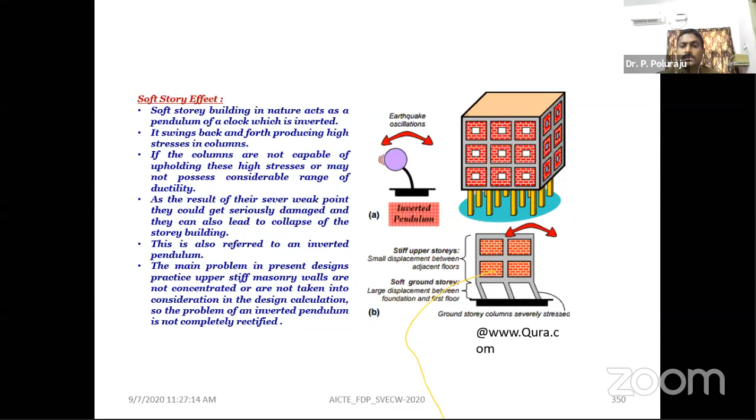And you can see the soft story effect - due to the soft story effect, how buildings are collapsing here. Yeah, necessity, purpose, methodology, and some other things.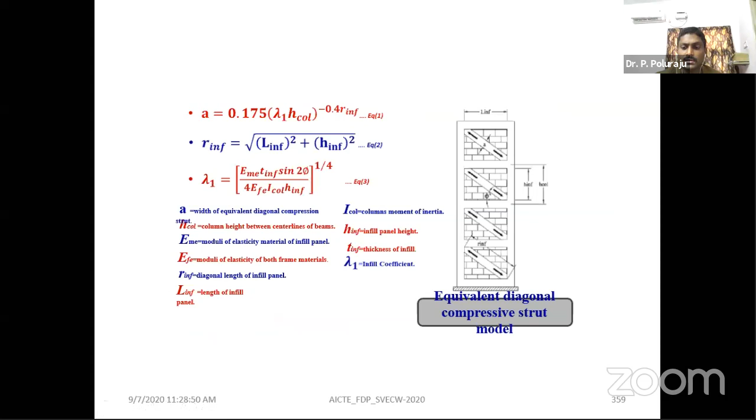And again, in the software, you can see how it has been taken to control the soft story effect. One idea we have also explored here is the equivalent diagonal compressive struts. When you introduce the equivalent struts diagonally, there is a chance of reducing the soft story effect. And you are getting the pushover curve here, then time period to performance points. This is the soft story effect idea.

Thank you about this presentation of the PPT, but I'm going to show one video which is there in the ANSYS software, how to analyze and design and analyze the basics - how to do the modeling and finite element analysis on the shear wall, because shear wall is the most critical portion of the structural element, I feel, because it will resist so many lateral loads in the form of earthquake loads. That is why I have taken it as one example, with a step-by-step procedure in the ANSYS workbench.

Actually, workbench is advanced compared to the basic ANSYS interface. So in the workbench, it has been done as a step-by-step procedure. It has been recorded - you can see it in the background, and I will give the voice explaining what is happening there. But finally, you can see the total modeling, how it is. I may skip some parts also, fast forwarding it because it is somewhat lengthy.

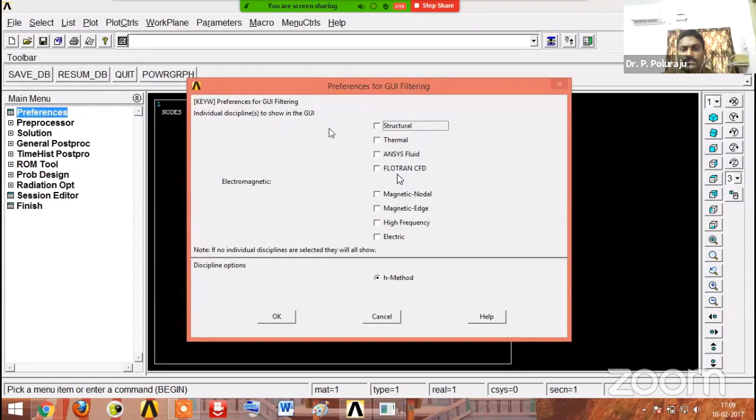Number of disciplines: structural, thermal, even ANSYS fluid, FLOTRAN CFD, magnetic nodal, magnetic edge, high frequency electric, like that. So that means people from many disciplines can use these options. That is the meaning of that.

Once you click on preferences, it will show like this. You move on that, you have to click structural, then say OK, then go to the pre-processor. First we have to do the pre-processing. After the pre-processing, in ANSYS you do the post-processing. In the pre-processing, select the element type. In the element type, again edit, add and edit delete button.

But it is very fast actually, you can try to observe, I will just give background voice. Then add it and take the beam. In that, take the link option, go to apply and go to solid. In the solid, again concrete 65. In concrete 65, once you select, link 180 also you have to select. Link 180 you select for the steel, concrete 65 you select for the concrete.

These are the models as interpreted in the ANSYS software. Of course, a few of you already know about ANSYS, so it's not new to you, but I have taken it as one example to explain the topic of soft computing techniques.

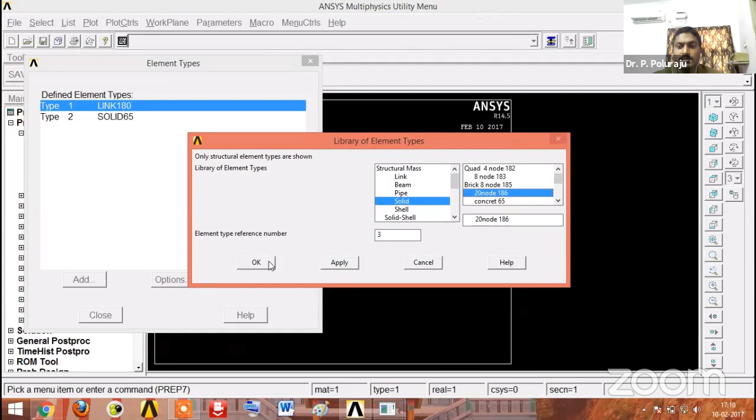I'll go back. After adding solid 65, 20 node 186 nodal thing also you have to select. That is for solid 186.

Next, real constants. Add link steel, cross sectional area 50.26 means 8 mm diameter, pi d square by 4, again set the area. Another steel 113.1, 20 meter square, because that is main steel, and maybe 50.2 for links actually, because pi d square by 4 is for the main steel as well as links. That is why that area has been added.

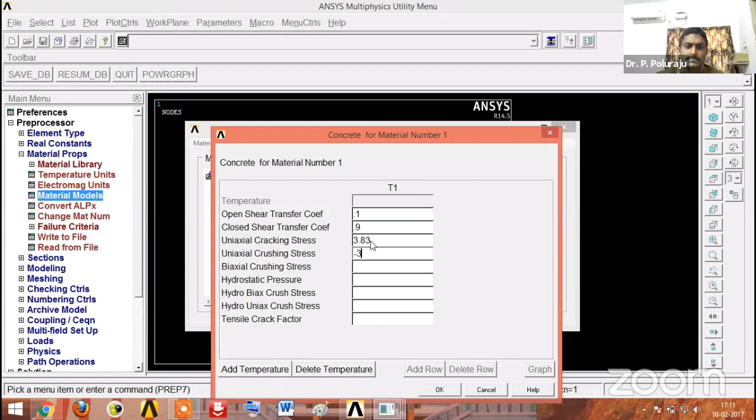After that, material models, then structural, linear, elastic, isotropic, then Young's modulus and Poisson's ratio. Young's modulus for the concrete is 5000 root FCK, which I have to calculate, and 0.17 has been taken. For steel, concrete, all the values, the calculated values you must give here. Density of the concrete. That is for steel, 0.3.

Yeah, this is actually most important. When you go to the rate independent one, what does von Mises criteria mean? These are basically failure criteria. Von Mises criteria we generally select for the steel, whereas Tresca criteria we generally select for the concrete actually.

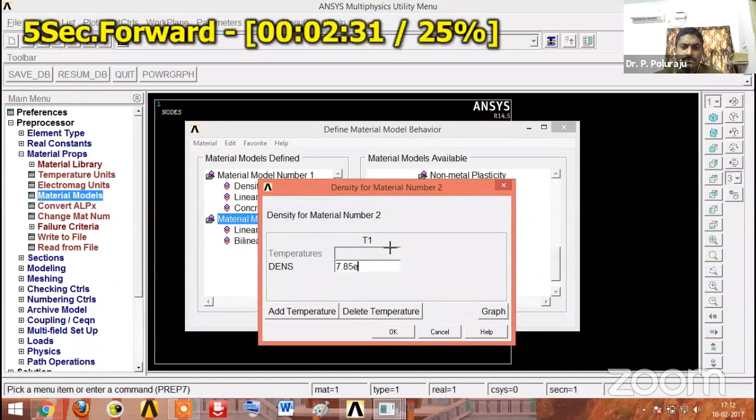Density is also given for the steel, which is isotropic. Again, another steel with Poisson's ratio and yield stress given. For both steels, density and Poisson's ratio, everything has been given.

Because three things we have created here. After applying this, you have to come to the interface of the diagram and do the replot. Replot means whatever process you did, it will refresh. If you don't refresh, you may face overlapping and other technical problems, and the model may not run properly. That is why you have to do the replot.

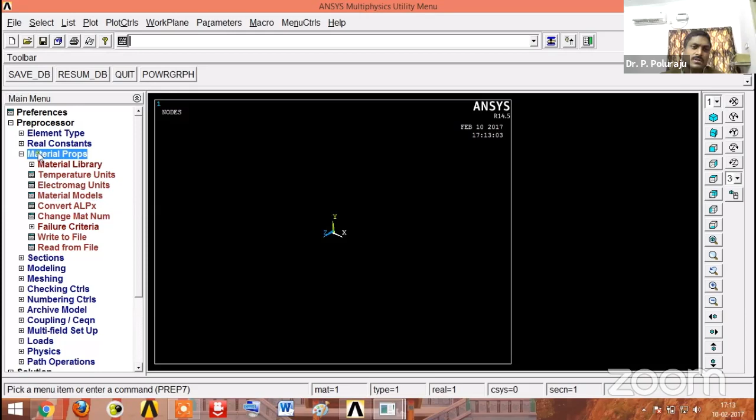Then section properties, create key points in active CS. Now creating the key points. Apply 0,0, already completed. Now another key point, 150 along the X direction. Then we give along X and Z direction. Created. At 2 nodal points, and 3 nodal points also done.

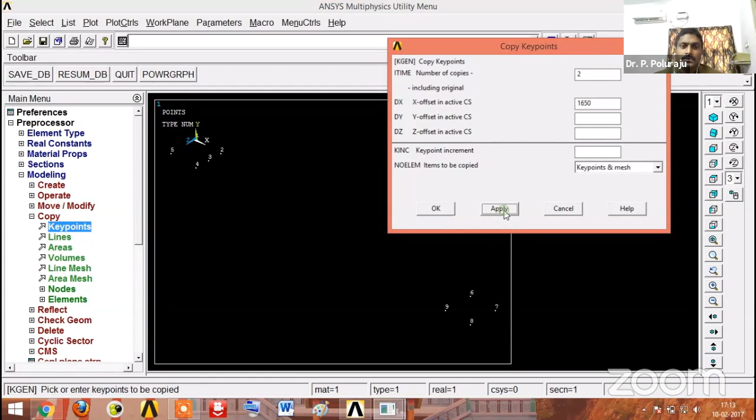Copy key points. After selecting the key point, the distances, you can add it. Through key points.

So what is being created now? It is creating boundary elements for the shear wall. This is the wall in between, which is the shear wall, and these are the boundary elements. Boundary elements are most important for the shear wall because they resist a lot of shear. Shear walls predominantly fail in shear, but you have to convert that into flexure. That is why they call it a shear wall.

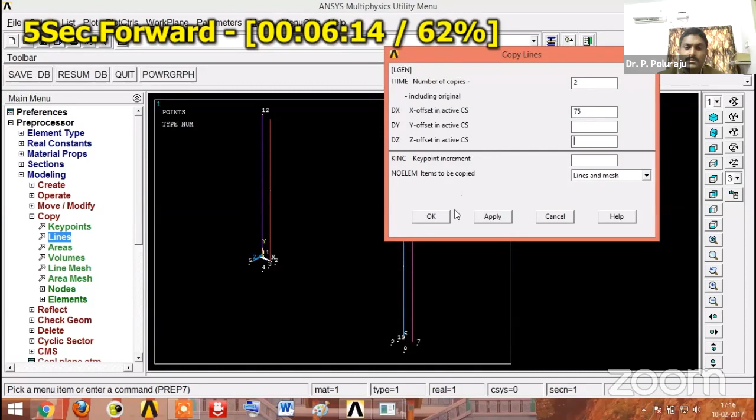So now you can create here the height of the shear wall. Once you create that by giving the thicknesses, offsets, and all, you can finally create it like this. The shear wall will be created like this. The model may not be that important, that's why I'm skipping this, but it's a repeated procedure.

What are these different colors? It is internal reinforcement basically, because vertical reinforcement and horizontal reinforcement are also most important in the shear wall. Once that is created, both horizontal and vertical reinforcement, the model is ready now with full steel in both the boundary element and the main shear wall.

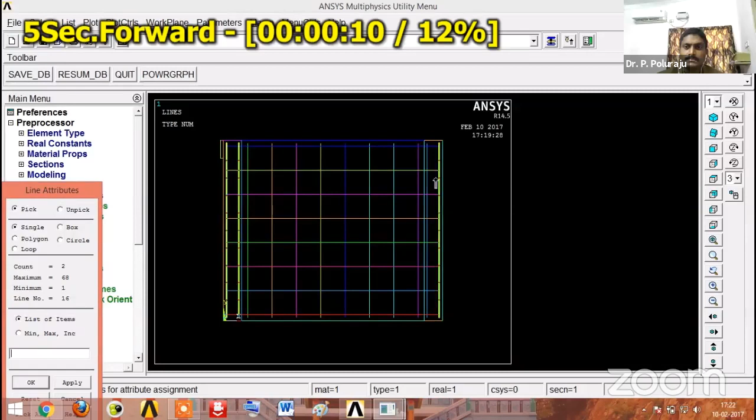And now, continuity. Likewise, it can be created. And whatever is created, you have to follow the same style: first you have to create the model, then after that you have to assign the things.

Yes, this is another important portion in this ANSYS software. Discretization is also most important, so 8-noded elements you have to create. Sometimes you may require serendipity elements - serendipity means keeping a nodal point without any support. With 8-noded elements, at each nodal point if you get the displacement altogether and make it an average of all displacements, you get very accurate displacement. That is why finite element analysis is most popular.

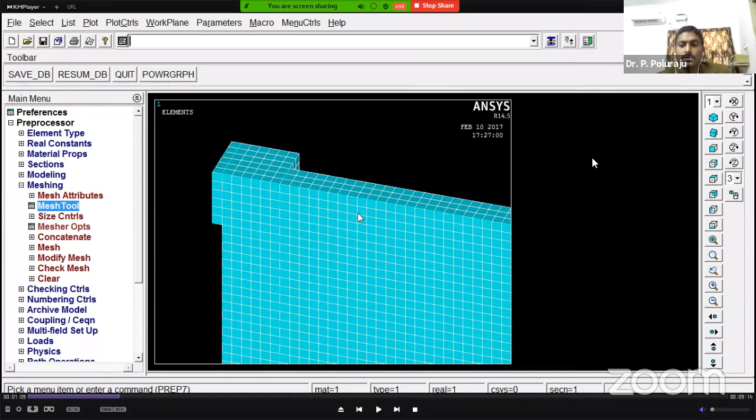But finite element analysis cannot be done for a whole structure, because the whole work would be very high, and the analysis and modeling would be so difficult. That is why I would particularly take one element like a beam, column, or shear wall, and do the modeling. It gives very accurate results, and we can do a lot of analysis after doing this finite element modeling.

For doing finite element analysis, there are plenty of softwares, but the most popular ones are ANSYS and Abaqus, and even NASA's NASTRAN is also popular. TNO Diana is also very popular, but these are not user friendly. ANSYS is also not that user friendly. So there are some drawbacks with different softwares, some missing parameters and other issues. But from an accuracy point of view, ANSYS is very good, and Abaqus is also very good.

It depends on your work level. Like in flight design, for mechanical and aeronautical purposes, people design everything in Abaqus - even some very advanced finite element software.

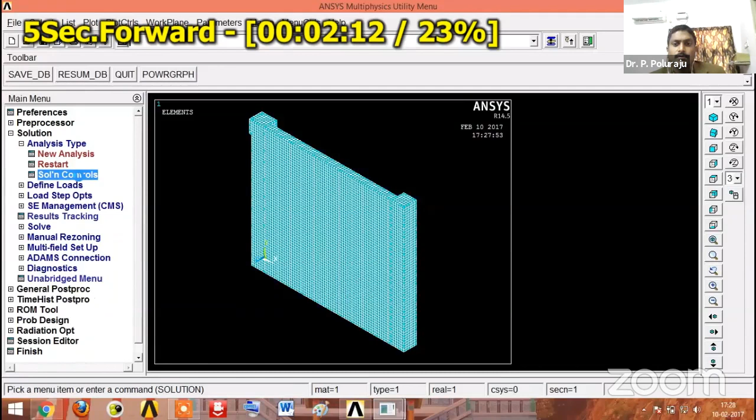So likewise, after doing the analysis and modeling, you can set up the analysis like this. Now fixity is also given at the bottom. So this is the way of doing the modeling and analysis of the shear wall in the ANSYS software.

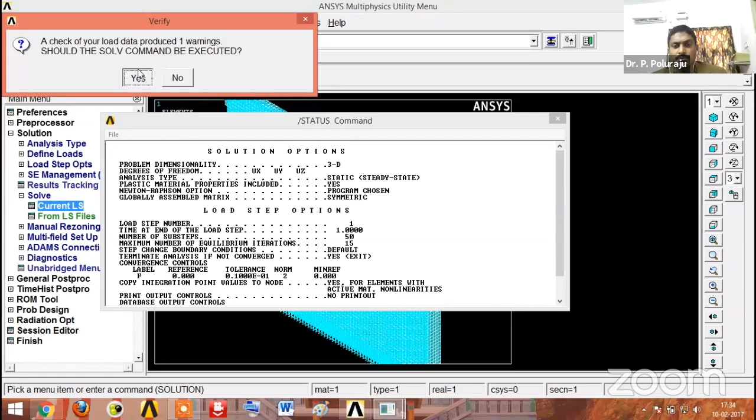Maybe inside there are many points I have not explained in thorough detail, but I just wanted to show you the overall idea of how to do the basic analysis and finite element analysis on one particular model, a higher model, that is the shear wall model. That is my main objective for this presentation.

Last video, it is getting running... it is over, I think. Yeah, it is over. So with this, I just wanted to close my presentation.

I have shown ANSYS, SAP 2000, Etabs, and even STAAD Pro at my starting presentation. So I feel I have fulfilled the objective of today's short-term training program on soft computing techniques in civil engineering, particularly on structural engineering. I showed different ideas like pushover analysis on performance-based design, comparative study on different seismic zones, soft story effect, and finally ANSYS modeling.